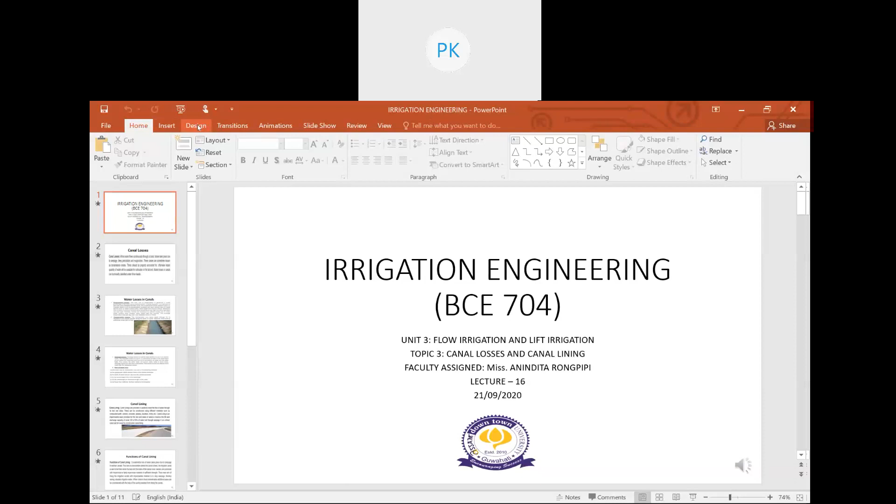Hello students, the next topic number 3 is canal losses and canal lining. So what is canal losses? When water flows continuously through a canal, losses do take place due to seepage, percolation and evaporation. These losses are sometimes known as transmission losses. They should be properly accounted for, otherwise, lesser quantity of water will be available for cultivation at the tail end, that is at the end of the canal.

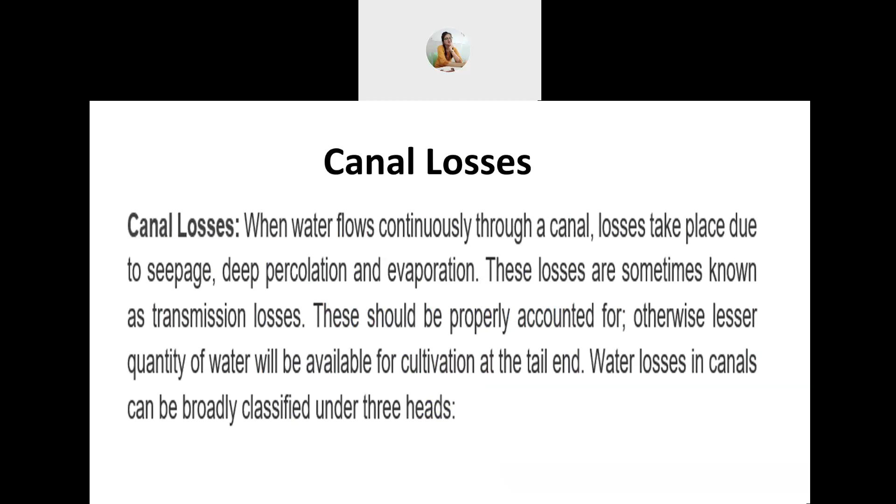So water losses in canals can be broadly classified under 3 heads. The first one is evaporation losses. The loss due to evaporation is generally a small percentage of the total loss in unlined canal. It hardly exceeds 1 to 2% of the total water entering into the canal. The evaporation losses depend upon climatic factors such as temperature, humidity, and wind velocity, canal factors such as water surface area, water depth, and velocity of flow.

Maximum loss is there in summer months when temperatures are high and wind velocities are also high. Similarly, losses are maximum in unlined canals due to wider water surface area, shallow water depth, and low velocity. The average evaporation loss per day may vary between 4 mm to 10 mm. About lined and unlined canals we'll study in our upcoming units.

Number 2, transpiration losses. The transpiration loss takes place through a lot of vegetation and weeds grown along the bank of canal. However, this forms an extremely small part of loss. In this picture you can see how water is lost in the canal.

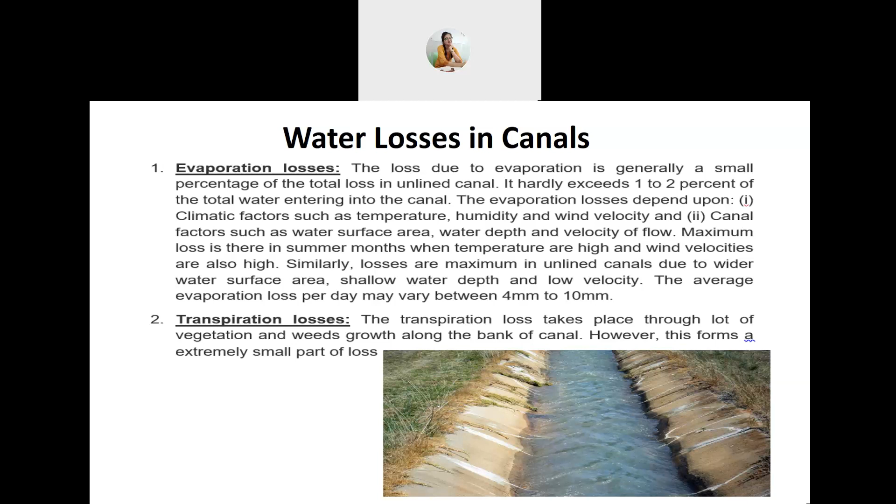Number 3, seepage losses. Seepage losses constitute major portion of loss in an unlined canal. The seepage losses are due to absorption of water in the upper layer of soil below the canal bed and due to percolation of water into the water table. It thus raises the water table. If, however, water table is much lower, seepage losses are only due to absorption. Percolation losses are always much more than the absorption losses.

Number 4, rate of water loss. Canal losses may be expressed in any one of the following methods. A, as cumecs per million square meter of the wetted perimeter. B, as depth of water loss per day over the wetted perimeter. C, as the percentage of the canal discharge. D, as the percentage per kilometer length of the canal. And out of these 4 methods, the first method is the simplest.

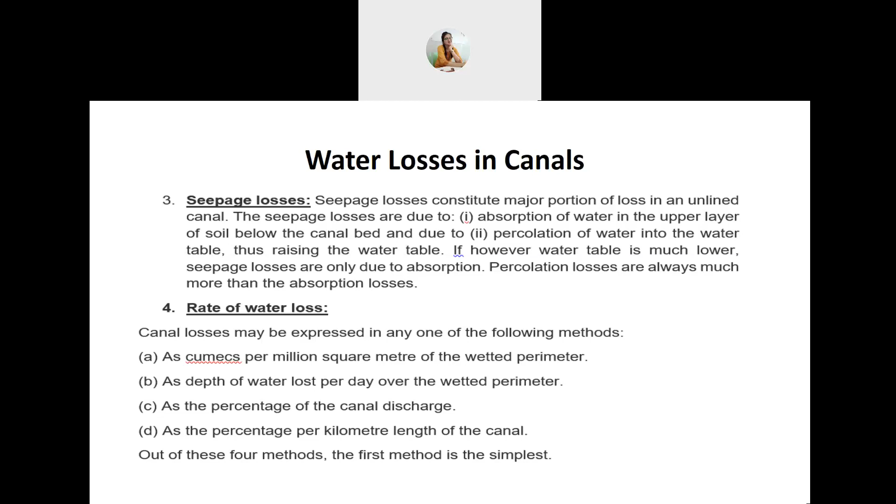Next, canal lining. Canal linings are provided in canals to resist the flow of water through its beds and sides. This can be constructed using different materials such as compacted earth, cement, concrete, plastics, boulders, bricks, etc. Canal lining is an impermeable layer provided for the bed and sides of canal to improve the life and discharge capacity of canal. 60 to 80% of water lost through seepage in an unlined canal can be saved by construction of canal lining. Here I have shown you a picture of canal lining.

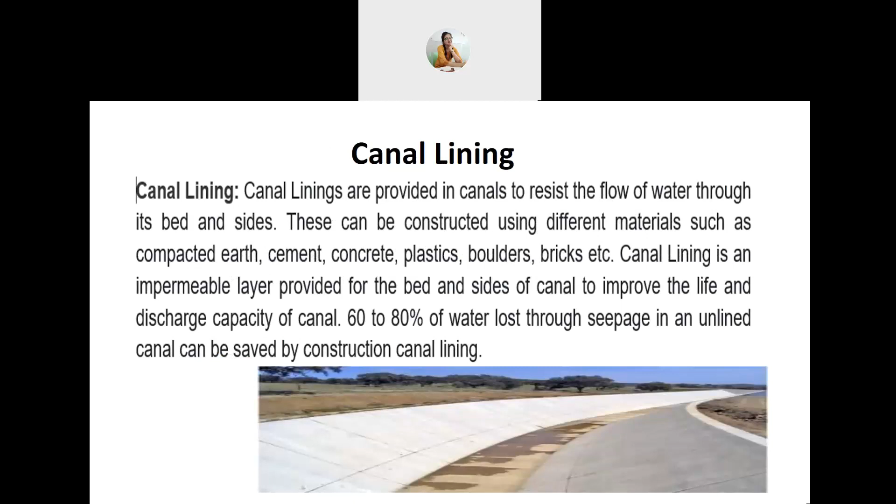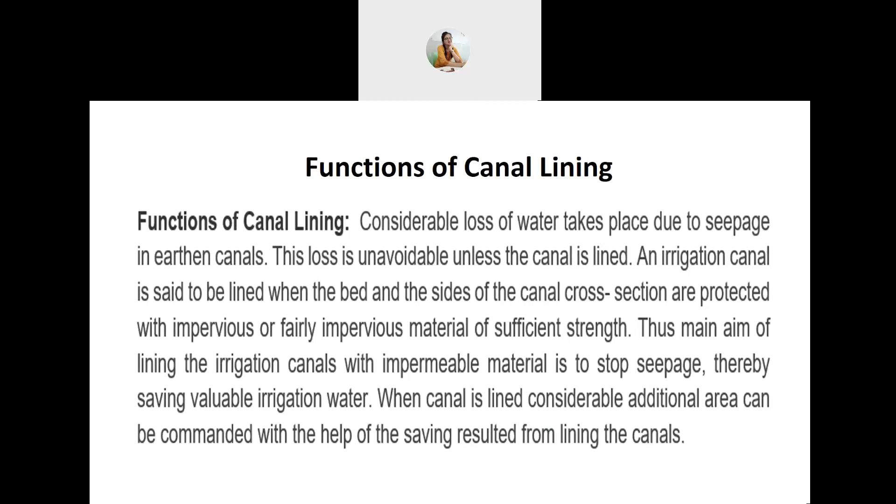Functions of canal lining. Considerable loss of water takes place due to seepage in earthen canals. So this loss is unavoidable unless the canal is lined. An irrigation canal is said to be lined when the bed and the sides of the canal cross-section are protected with impervious or fairly impervious material of sufficient strength. Thus, the main aim of lining the irrigation canals with impermeable material is to stop seepage, thereby saving valuable irrigation water. When canal is lined, considerable additional area can be commanded with the help of the saving resulted from lining the canals.

Next, in continuation with functions of canal lining, when a canal is to be lined, the canal may be built to much smaller cross-section than an unlined one as there is practically no loss in the lined canals due to seepage. Condition of canal is also improved a lot and as a result it requires less maintenance. Lined canals check waterlogging in the areas adjoining the canals.

Existing canals may also be lined, but then the construction work may interrupt the irrigation supplies. The canal in head reach does not need lining. The obvious reason is that the seepage water is not lost totally. It goes back to the river. However, sometimes it may become necessary to line the canal in the head reach also.

Then the maintenance of the canal becomes an important problem as the water table in the head reach is usually high and water behind the lining may create unstable conditions. The lining of existing or proposed irrigation canal is justified economically when the cost of the lining can be recovered from the increased monetary benefits in a reasonably short period.

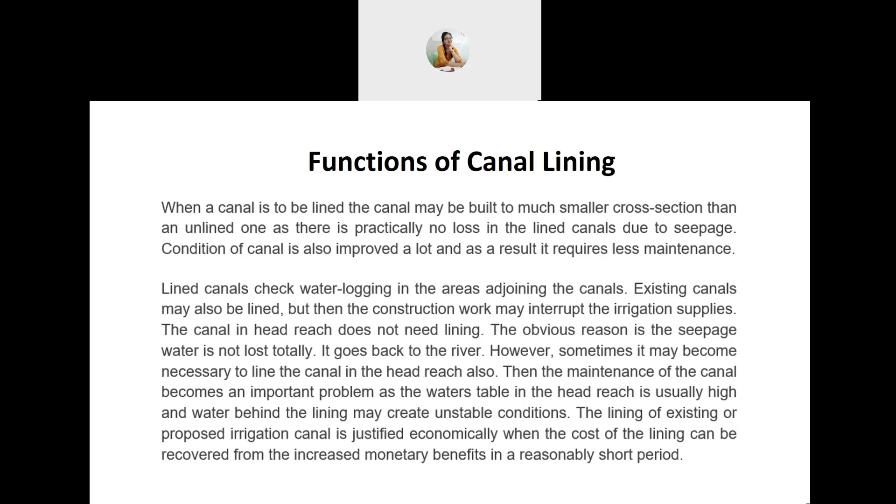Advantages of canal lining. There are 6 advantages. The first one is seepage reduction. Number 2, prevention of waterlogging. Number 3, increase in commanded area. Number 4, increase in channel capacity. Number 5, less maintenance. And number 6, safety against floods. This is important.

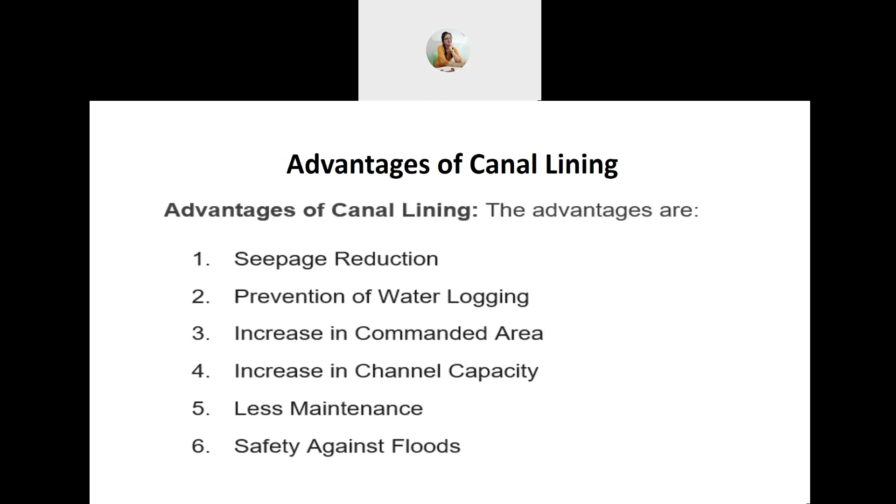So number 1, seepage reduction. The main purpose behind the lining of canal is to reduce the seepage losses. In some soils, the seepage loss of water in unlined canal is about 25 to 50% of total water supply. The cost of canal lining is high, but it is justifiable for its efforts in saving most of the water from seepage losses. Canal lining is not necessary if seepage losses are very small.

Number 2, prevention of waterlogging. Waterlogging is caused due to phenomenal rise in water table due to uncontrolled seepage in an unlined canal. This seepage affects the surrounding groundwater table and makes the land unsuitable for irrigation. So this problem of waterlogging can be surely prevented by providing proper lining to the canal sides.

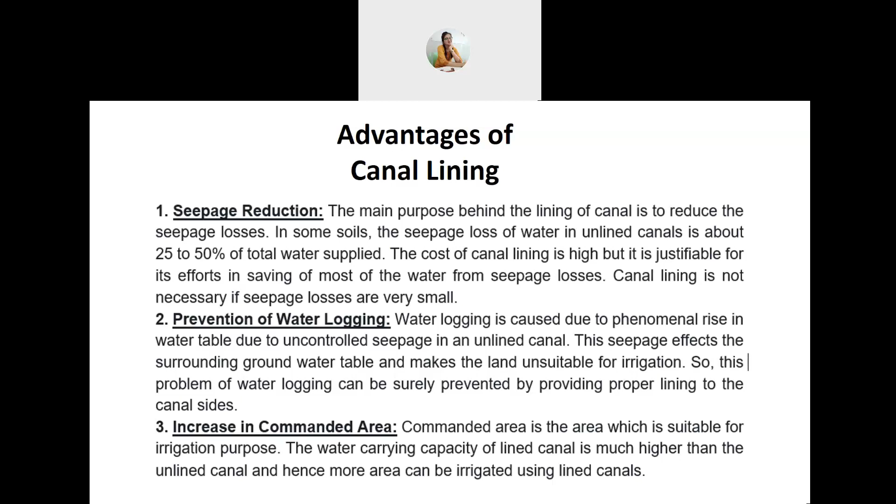Number 3, increase in commanded area. Commanded area is the area which is suitable for irrigation purpose. The water carrying capacity of lined canal is much higher than the unlined canal and hence more area can be irrigated using lined canals.

Number 4, increase in channel capacity. Canal lining can also increase the channel capacity. The lined canal surface is generally smooth and allows water to flow with high velocity compared to unlined channel. Higher the velocity of flow, greater is the capacity of channel and hence channel capacity will increase by providing lining. On the other side, with this increase in capacity, channel dimensions can also be reduced to maintain the previous capacity of unlined canal, which saves the cost of the project.

Number 5, less maintenance. Maintenance of lined canal is easier than unlined canals. Generally, there is a problem of silting in unlined canal, whose removal requires huge expenditure, but in case of lined canals, because of high velocity of flow, the silt is easily carried away by the water. In case of unlined canals, there is a chance of growth of vegetation on the canal surface, but not in case of lined canals. The vegetation affects the velocity of flow and water carrying capacity of channel. Lined canal also prevents damage of canal surface due to rats or insects.

And last one, safety against floods. A lined canal always withstands floods, while unlined canal may not resist. And also there is a chance of occurring of breach, which damages the whole canal as well as surrounding areas or fields. But among all, concrete canal linings are good against floods or high velocity flows.

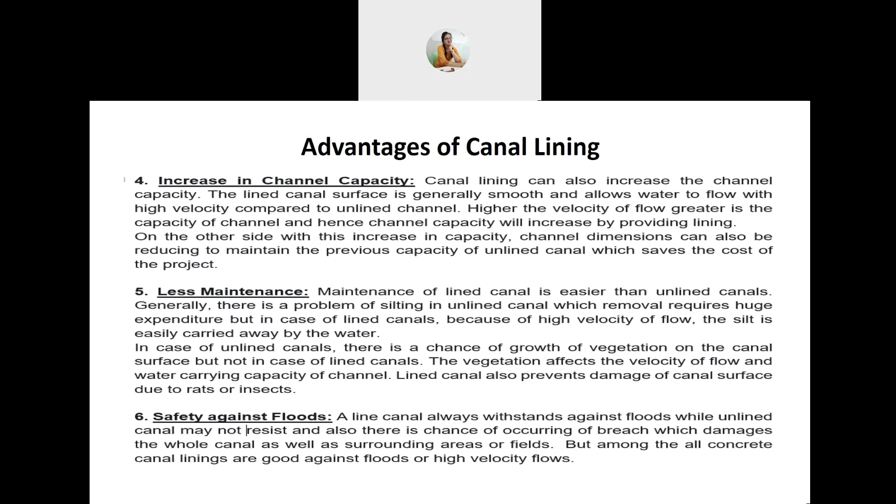So this is your assignment for lecture number 16. The question is, what are the possible causes of water losses in canals and what are the methods adopted for reducing such losses? I repeat it again, what are the possible causes of water losses in canal? What are the methods adopted for reducing such losses? So we'll watch a video.